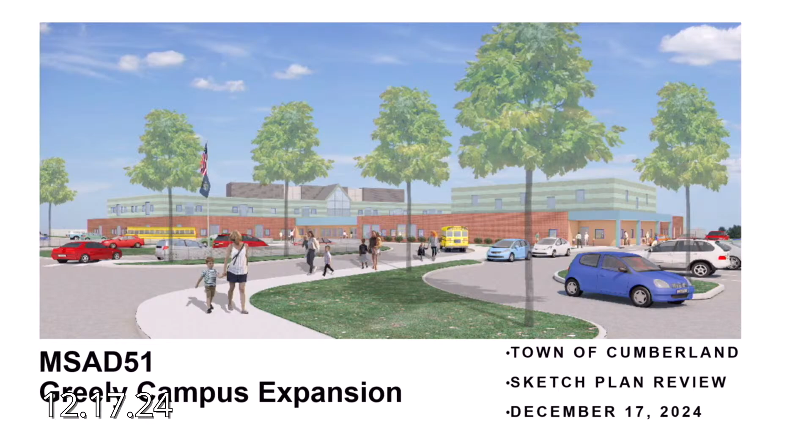Thank you. Good evening, I'm Jeff Porter, the superintendent at MSAD 51, and Pat will be providing the presentation, but I have a few words to introduce. First, the whole idea for the plan you're going to be presented with started back in 2018 with our strategic plan for MSAD 51. This came out of community conversations back in 2017-18, where our enrollment in the district started to go in a different direction than had been forecasted before. So the goal of the strategic plan, which is still in place today, is to review the district's long-term elementary education program and structures due to increasing enrollment now and into the future.

Just to give you a quick baseline, for Mabel I. Wilson School, which is pre-K through grade 3 right now: in 2014-15, there were 537 students enrolled. Today there are 730 students enrolled, and next September there'll be 752 projected. At GMS 4-5, in 2014-15 there were 315 students. Today there are 375 students, and in September we'll have 387 students, just to give you an idea about the continuing enrollment increases.

So elementary pre-K to 5, in 2014-15, there were 852 students altogether. Today, there's 1,105 students, and in September of this year, 2025, there'll be 1,139 students. So currently, we have 29 modulars on the campus.

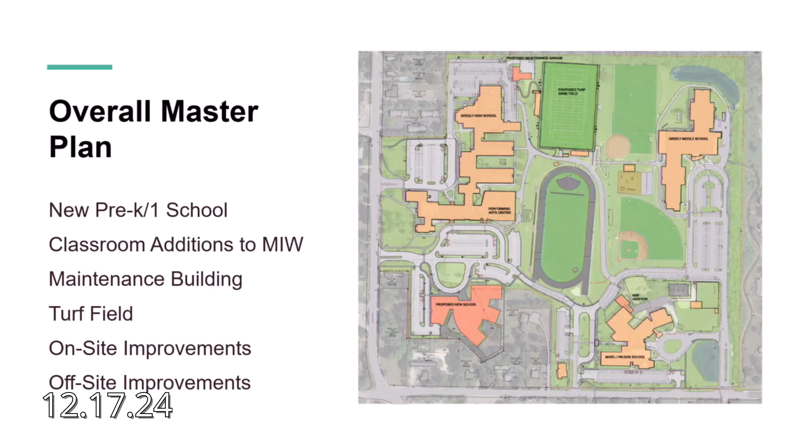There are also some small off-site improvements required. We've submitted for a traffic movement permit—the existing one on the campus expired, and because of the new school they're saying we need a new one. So that's been submitted, and we're working closely with the town on what those off-site improvements might be. They're minor in nature, but still pretty important, and we want to make sure everybody's on board and in agreement with those.

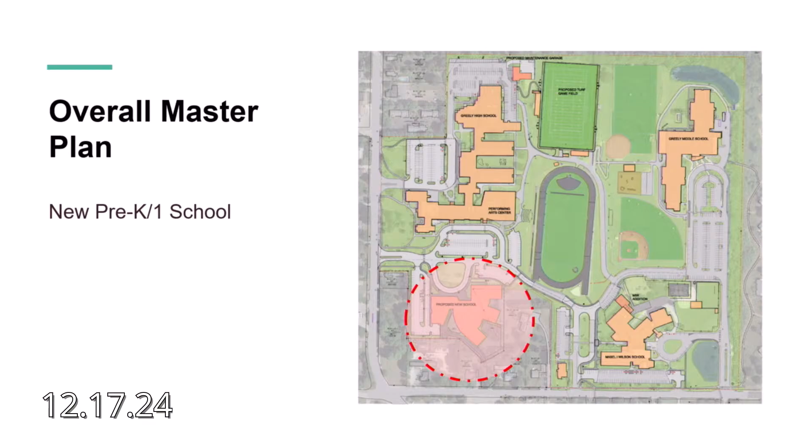So this is a pre-K through 1 school. The idea is that the pre-K and grade 1 students from Mabel Wilson will move over to this new school. Mabel Wilson will then be reconfigured as a 2, 3, and 4 grade school—grade 4 currently being in the middle school will move back to Mabel Wilson. Greely Middle School will be grades 5, 6, 7, 8, and the high school will remain 9 through 12. That's the grade restructuring that's going to happen.

The new school is designed to accommodate about 565 students, so it's a significantly large building. It's not insignificant, but as you can see, it begins to form the four quadrants of the campus, and it really does bring some closure to this whole property.

This is a site plan we're working on now. These are pretty well developed, but not yet at the point where we want to submit them—we want to maintain some flexibility so if issues or discussions come up, we can make changes. The idea here is we're going to maintain the existing main drive into the school campus.

First thing you come in, there'll be a parking lot area here, near the town cemetery. This will be staff parking, but it also forms a kind of queuing area for parent drop-off along this side—dedicated parent drop-off for the littles at this new school. There are 11 dedicated drop-off spaces, plus plenty of room for stacking in the drive aisle. The parking here accommodates about 65 parking spaces.

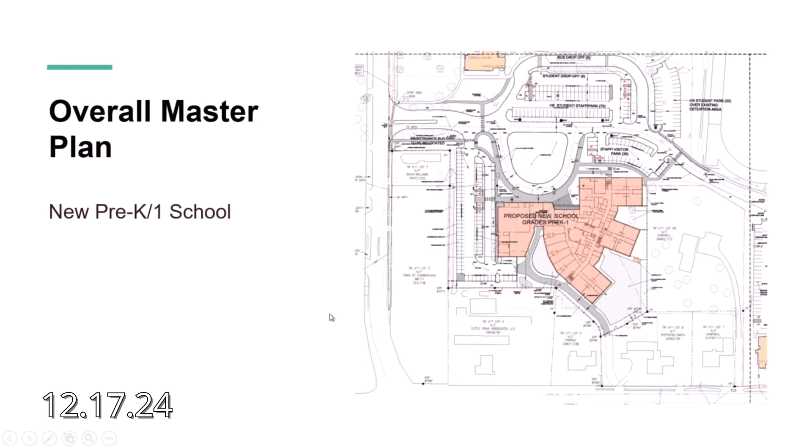Second item here is at Mabel Wilson. There's some circulation improvements, but the major building piece here is a small addition off the northwest or northeast corner of the existing classroom wing.

This will be, I believe, 4 classrooms, a 2-story structure that ties right in here. It's a kind of funky footprint, and the reason is because there are currently 2 big portable classrooms on this site, right here.

The idea is to build this addition while the school is still in session, while those classrooms are there, rather than waiting until the new school is built and then removing the portables before building the addition. So it's a different footprint, but it works within the confines of everything going on here. That's the small addition to Mabel Wilson.

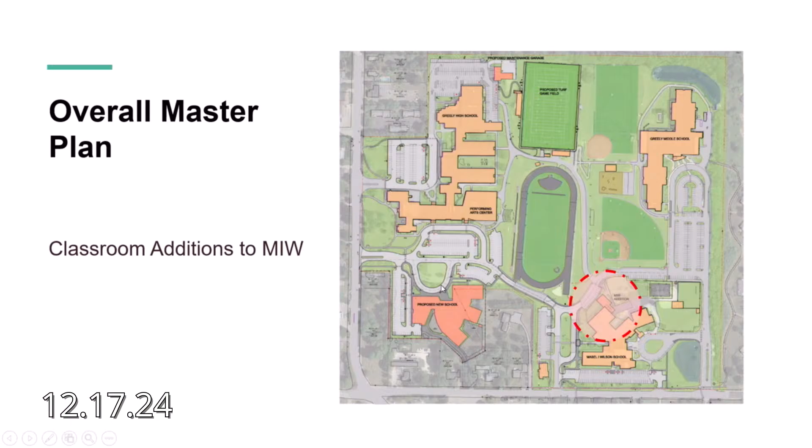This is the addition here, where the portable classroom buildings were, there are 2 buildings, one here and one here. Those will be removed ultimately, and that area will be returned to dedicated recreation space for Mabel Wilson.

Right now it's programmed as a basketball court, because we're going to be bringing 4th graders, older kids, onto this campus, and most of the playground equipment here is really designed for smaller age kids, so this will accommodate the older kids.

Where the portable was over here, this is just going to be reclaimed as grass open space. If you remember, Tuttletown was in this area initially before the portables came onto the site.

Tuttletown got moved over to this corner of the site, which was part of the open green space. They lost some green space there, and so now we're able to bring it back to the school again.

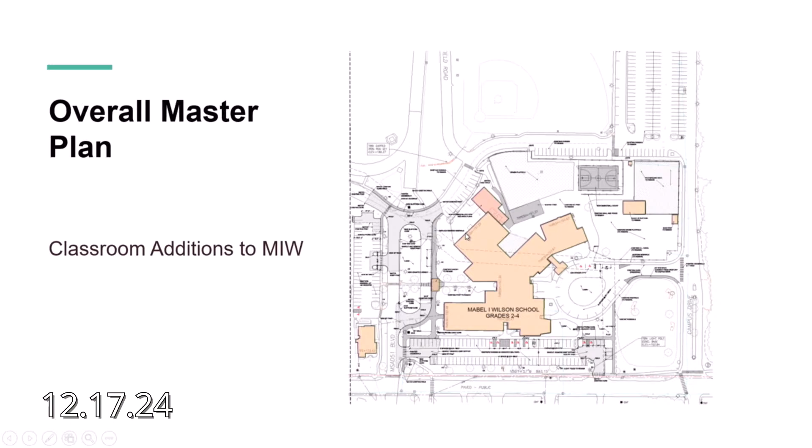The new maintenance building is up in the corner here. We were before you probably 2 months ago, and that building was approved at that point in time.

That building, in spite of its great appeal, is in pretty rough shape. So the idea now is to replace it up here in this corner of the site, back behind the pool, in an underutilized area of the property. That has been approved by the board.

I think we're pretty close to going out to bid on that project right now. So that's what's going on here.

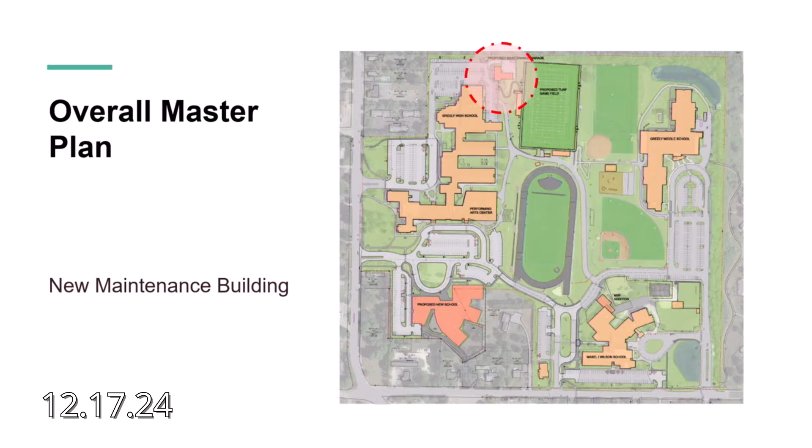Here's the building. It'll be a drive. It's really a 1-story building with a step in it. It'll drive down because there's about 6 feet of grade change between the parking lot up here and this lower area.

All of the yard storage and usage areas for the school will be in this lower area, which will be fenced off. It'll be hidden from view from most of the campus, and we think it fits into the campus really well.

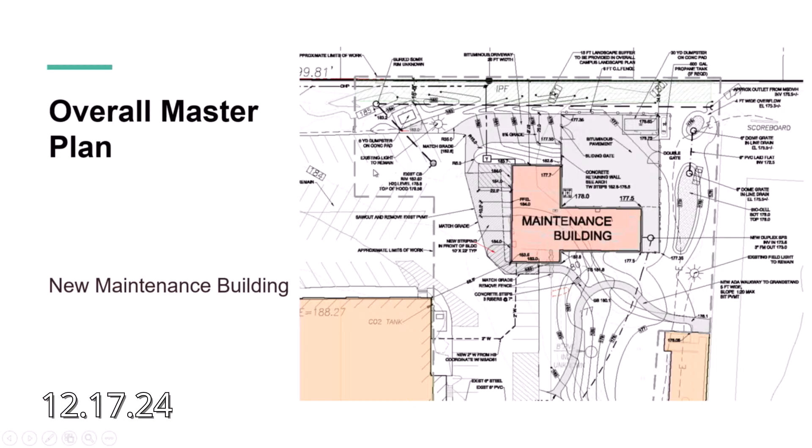Next item is the game field, the turf field. We've been working closely with the turf committee on selection of a vendor and a type of product for the turf.

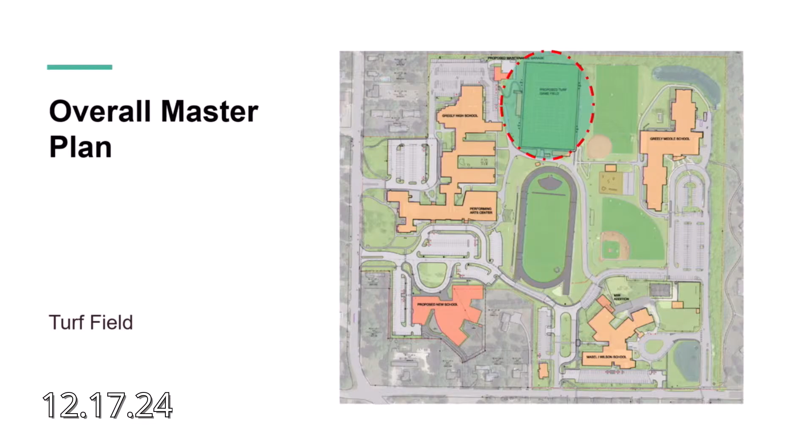Unfortunately Jesse, who's the chairman of that committee, isn't here, but the board came to us with pretty specific criteria. They wanted no crumb rubber, no PFAS, and a fully recyclable product.

So we interviewed six or seven turf vendors, and they ended up selecting a product which the board approved at their last meeting. It's fully recyclable, there's no infill at all in it, so that takes that whole issue out of the equation, and it's certified PFAS free.

This will be the first field of this type installed in New England at all, so we're leading the charge on this. I think it's going to be required eventually — in Europe they said it's going to be required in two or three years, so we're pretty excited about it.

The vendor's really excited to get a product like this going, and that project will hopefully get done this next summer.

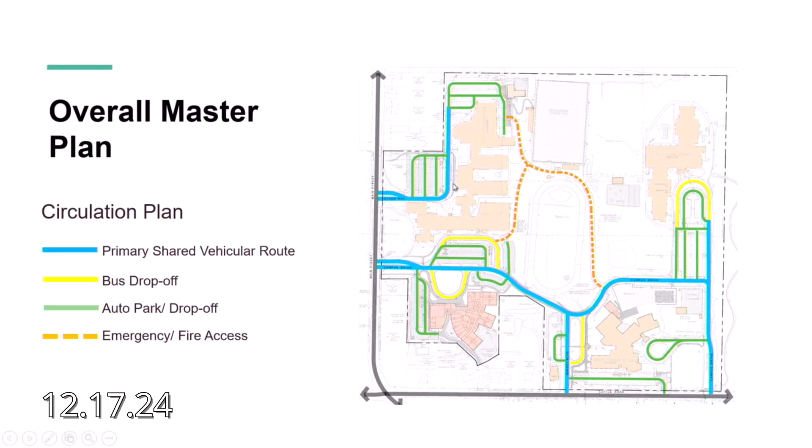We're doing that in a pretty cost-effective, simple way, primarily by taking a look at how these parking lots are currently laid out, and a lot of them don't meet current standards as far as aisle widths and so forth. They're congested, they're kind of unsafe, and so by reconfiguring those, we're able to add some parking with very little addition of impervious cover.

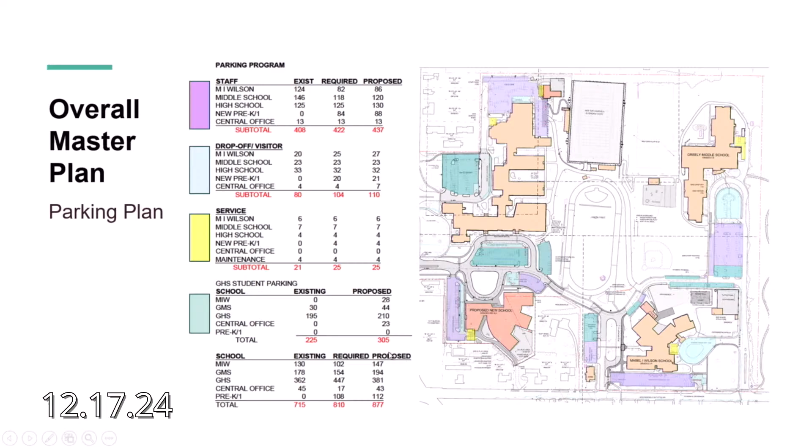A couple of small conversions, and I'll show you here. In this area, reoriented 90 degrees from the other plan, this is coming in off of Geiger Way. This is the Geiger building here. Currently, this comes in and it's one way through, extends to the back, and then it's one way out from this point on. This loops around and comes in here. This existing parking lot is only like 52 feet wide.

It really needs to be, each of these bays need to be 60 feet. The existing parking lot that's there is very narrow. The aisles are really tight, and I don't know if anybody's been in there at night trying to get in and out of those spaces, but it's very, very difficult. So we first looked at this and said, well, we really just need to expand that in order to make that safe and meet the town standards as far as parking spaces.

Then we started looking at, well, we're also impacting the high school parking at the PAC, and we need to accommodate that somewhere. So what we've done is this drive through here currently comes in about right here. All we've done, this would be the expansion of the existing to this point, is really more or less add parking on both sides of that drive aisle going out. By doing that, we've picked up about 30 spaces in there, which is a really good thing.

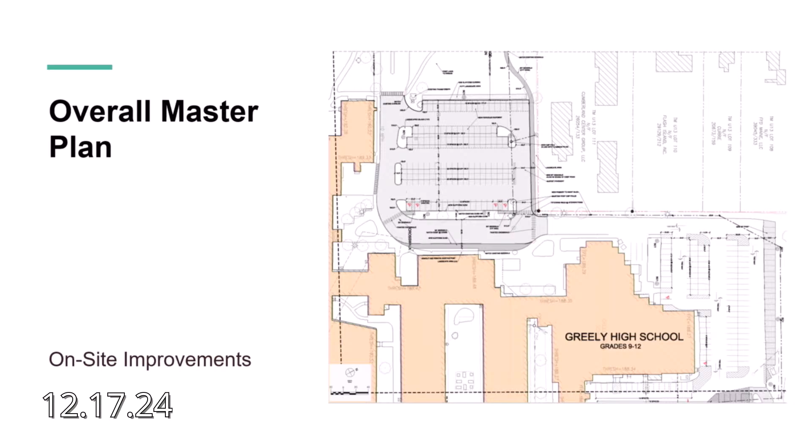So one of the other lighting areas that wasn't in our original program, but Jeff has asked that we take a look at, is the lighting that goes from the field area along the back side of the high school over towards the PAC. That area is pretty dark at night, and a lot of people park there to go to events at the game field. So we're adding some lighting there too.

This is the landscape and lighting plan. I know it's hard to see at this scale, but we intend to provide buffering along the property lines. We hadn't originally planned any here because there's a high fence, but given today's discussion, we're willing to take a look at that and add it to the plan as we move forward.

Based on conversations, it wasn't with the board, but we had a council meeting regarding proximity or some relief relating to the cemetery, and one of their comments was to add some buffering along the cemetery here. So we've got that.

We've got buffering along all sides of the new school to deal with the neighbors. We've met with this neighbor, who's your postmaster, and it's kind of tight in here, but he's on board with us planting some plants on his side of the fence to accommodate that, and we've got some agreements we're working on.

There's some new plantings associated with any of these areas that we're touching — trees, shrubs, and ground covers. So it's a pretty robust landscape plan, and it'll continue to evolve until we get to the point where everybody's pleased with it.

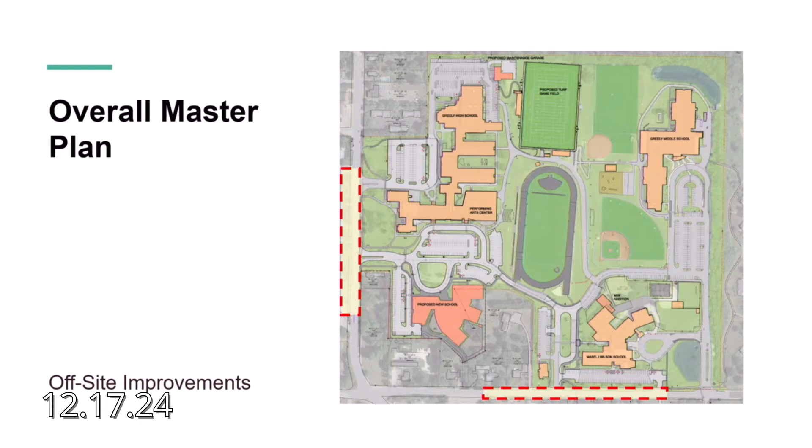Any questions about any of this so far? Well, why don't you finish it, then we'll do the questions. Okay.

The way this works is they'll complete the presentation, and then the board will ask their questions, and afterwards we'll let the public. My preference is, if it's civil engineering related, we'll have the civil engineer answer; if we've got questions for the superintendent, we'll have him. So probably the three of them, but the board gets the first cut at it. So have you got some more, Pat?

Well, I think what I talked with Andy about — he's excited about going through a small presentation on stormwater for you guys. I think since probably 80% of the people here are concerned about stormwater, that will be fantastic. Okay, so I'm going to turn it over to Andy.

And then the only thing after that is really, we've got a couple more images of the school, if there's anybody that has any questions about the school. I don't think at this point people are more concerned about ground issues, if they are, than the style of the building. I would agree with that. And then there was just a couple wrap-up things about schedule and where we are in the process. Let's get Andy to do the engineering thing, the board will have a cut at it, and then we'll turn it over to the public. Good evening, folks.

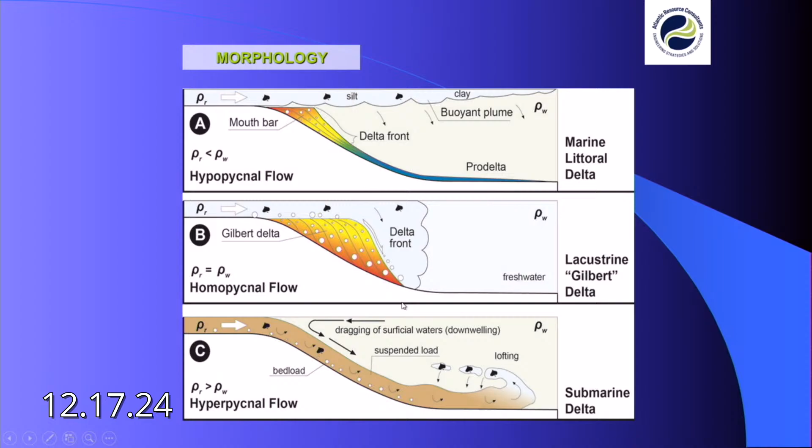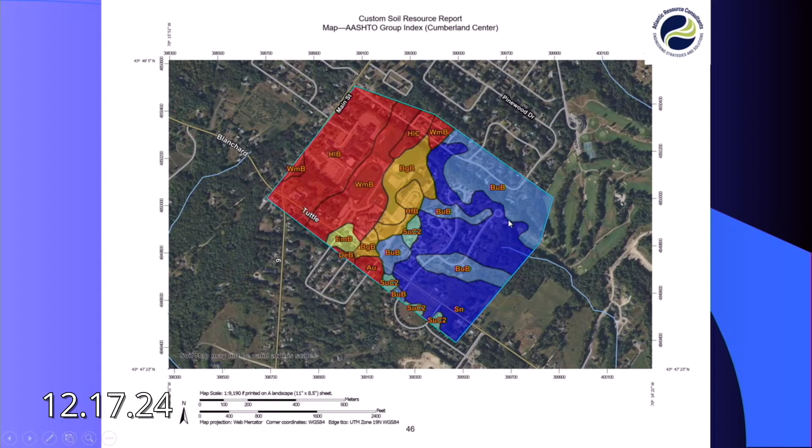So what does that look like on a soil map? These two colors are a little inverted, but I'll talk you through them. This is what's called an AASHTO group index of the soils. It shows soils in red and orange that are predominantly coarse-grained, sandy, and in blue, finer and finer graded soils. The dark blue here are the real fine-grained, silty clay soils. The second one I'll show you, which is even more striking, is the NRCS web soil survey, which does these helpful ratings. This is a rating for ease of construction, or restriction of dwellings without basements.

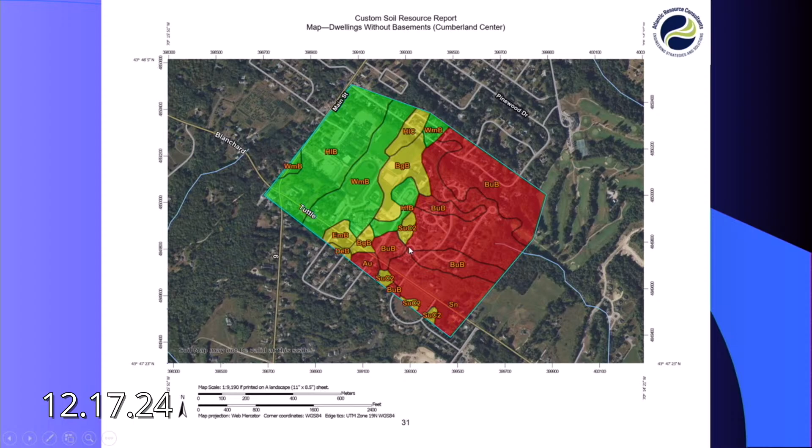The greens show areas that are not restricted. The yellows show areas that are somewhat restricted, and the reds show areas that are very restricted. These are very restricted because of high water tables, poor drainage, and all the things you would expect on the soil types that you see here because of the landform we talked about.

So given those base conditions, what has happened to the campus over the years that has contributed to or alleviated some of those soil conditions?

If I go back to this, the whole area slopes down to the south and east. Under this condition, everything off that soil, off the school campus, drained basically by sheet flow down to these drainage ways that come across this site. Some of the area up here drained off and down across the site to what is the headwaters of the stream here. So the whole school area drained down onto this property before anything was built.

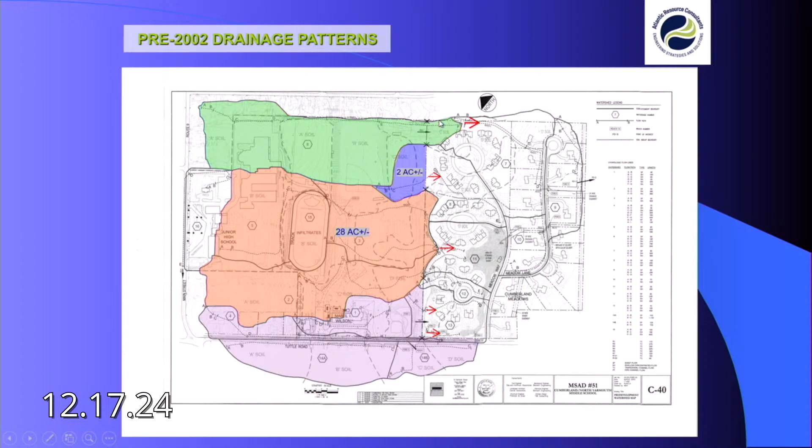This 2-acre area here drained down to another area that drained through the Cumberland Meadows site. Then you have the green area at the top, which runs down that swale between the school property and the properties to the northeast here. You'll see as I run through the timeline what has happened to that.

So when they built the middle school, they put in this detention pond here. One of the things they wanted to do with this plan was to reduce the amount of runoff coming onto the Cumberland Meadows site.

So what they did is captured all the area in blue, took it to this new detention basin, and then piped it through the neighborhood. I've drawn this as a straight line - you'll see where it actually runs in a minute. It actually runs down here, down here. Initially it outletted about here, and then it was continued down to the far side of Meadow Lane, to where the drainage system for this entire development outlets.

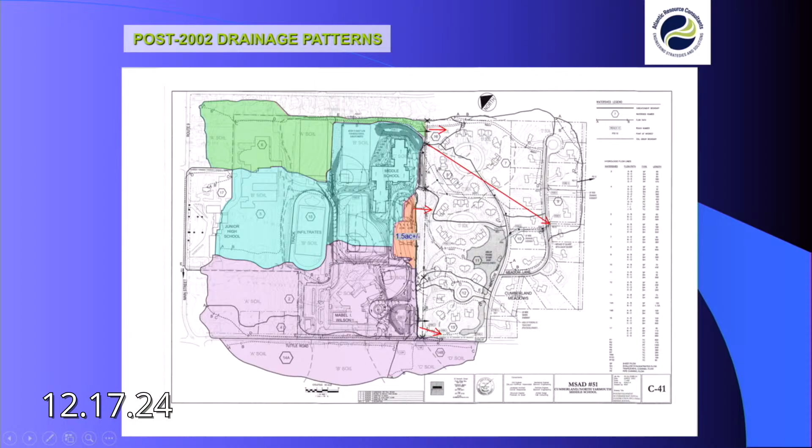So basically, all of that blue area was designed to go through the detention basin and bypass the whole of the Cumberland Meadows site, taking that out of the contributing area to Cumberland Meadows and Meadow Lane. What was left is this little 1.5 acre area of the middle school parking lot, which was too low to get into the basin to get around. So effectively, that plan reduced a 28 acre area down to 1.5 acres contributing to the Cumberland Meadows site, again just to alleviate the drainage issues there. So this is what it looks like on an aerial.

So the summary of that, what they did for the middle school, which was presented in the stormwater report at the time, showed this area, what they call point of analysis number 2, this smaller, reduced area of 1.5 acres, and it shows what it did to the runoff. I'm sure you've seen these in stormwater reports you've reviewed before. Basically you look at the pre-development and post-development runoff under the 2-year, 10-year, and 25-year storm, and you can see the pre-development flow compared to the post-development flow. So you had reductions in peak flow, anything from 60% to 80% in the 25-year storm as a result of what they did there.

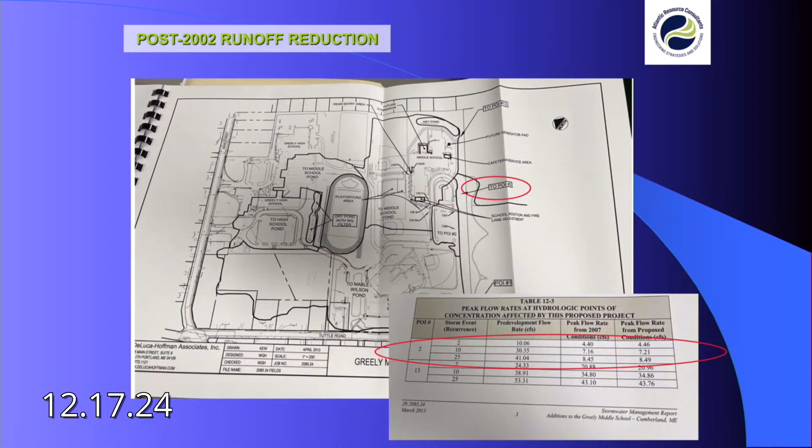And the summary in the 2013 stormwater report appeared to indicate that they thought this had alleviated a lot of the drainage issues on the Cumberland Meadows and Meadow Lane sites.

Of course, with those soil conditions, these things have to be maintained and continue to drain well. Typically in those really heavy soils, it's pretty significant engineering intervention that you need to keep the water table down, usually involving numerous underdrains, networks of underdrains. In soils like that, they'll typically operate somewhere between a 15 and 20-year cycle, if you're lucky, before they start silting up and need renewal. I think some work has recently been done on the Cumberland Meadows site to renew some of those underdrains. That's entirely expected.

So moving on to the new project, we want to take the same approach as far as water quantity goes as has been done in the past. The plan is basically to expand that blue area even further to take more of the campus down through that detention basin and bypass it right through the Cumberland Meadows and Meadow Lane subdivision.

We do that by capturing the field, which wasn't previously captured, and the new school roof drainage and parking lot drainage is piped into the system that goes into the basin that currently exists, which we're going to put underground down here. It all goes down to that detention basin and out piped through to the downstream end of the Cumberland Meadows and Meadow Lane subdivision. So that's essentially the approach we're taking.

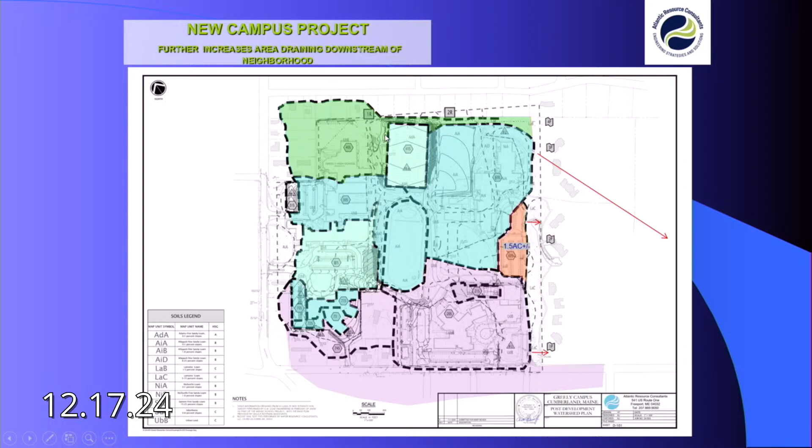As far as water quality goes, we're looking at some infiltration using underground chambers for the roof runoff for the new school. As Pat mentioned, some pervious pavers here, some pervious pavers in the parking lot addition, and then the stone base and granular borrow under the field effectively filters that before it goes into the collector drains. I'll talk a little bit more about that in just a second.

So this gets into some of the questions we've received, quite a few of them through letters sent to DEP, which then forward them to us and ask us to respond. We've put together responses to all of those, but we're not going to send them in until after this meeting, because other things may come up and we may want to address those in that same response.

The first one was notifications. If there's anybody here who didn't get a certified notification of our DEP filing, please let me know. I can leave you my card and my email address. I know DEP did receive a couple of letters saying people hadn't been notified. The people concerned were actually on our certified mailing list, so mailings were sent. I think Carolee was one of them.

I think what happened was we sent out the certified mailings before we put in the application, but you know how the Postal Service works now. The town was notified that the application had gone in, but some of the certified mailings hadn't been received yet, even though they'd been sent out. So I think there was a delay somewhere in there, and Carrie can probably fill in the blanks when she comes up to talk. But there was some confusion.

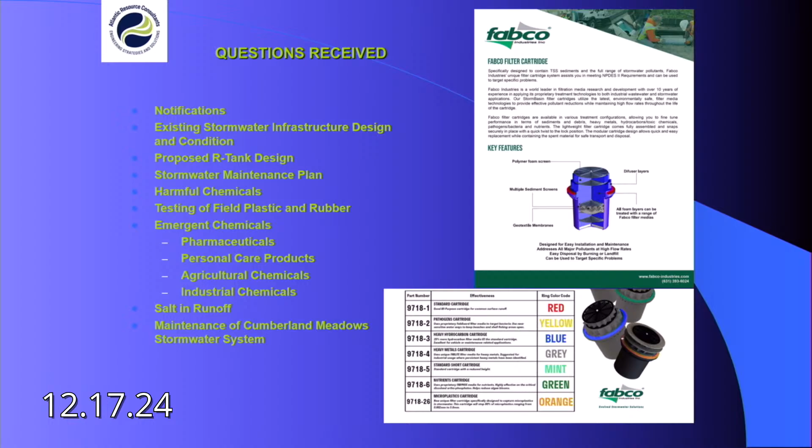So what you're saying is that we can have a wonderfully designed drainage system that the district does, but unless something is done on the town side, you've still got basically a swamp down in Cumberland Meadows unless the town upgrades their drainage system?

Well, if you look at the base soil conditions, the hydrology, and the morphology of that site, there are things we can do and things we cannot do. It doesn't matter what you do on the site—this location has always been wet and will always be wet. Short of under-draining, and with the particularly heavy soils they have down there, you'd be talking about putting herringbone under-drains 20 feet on center, which is what you'd do if this were an agricultural field to dry it out. The water table is high, the soil conditions are poorly drained, and it will remain a wet site. There are things you can do to reduce or mitigate the impact of the wetness, but you're never going to fully solve it because it sits at the bottom of a landform where the water table's high and the soils are poorly drained.

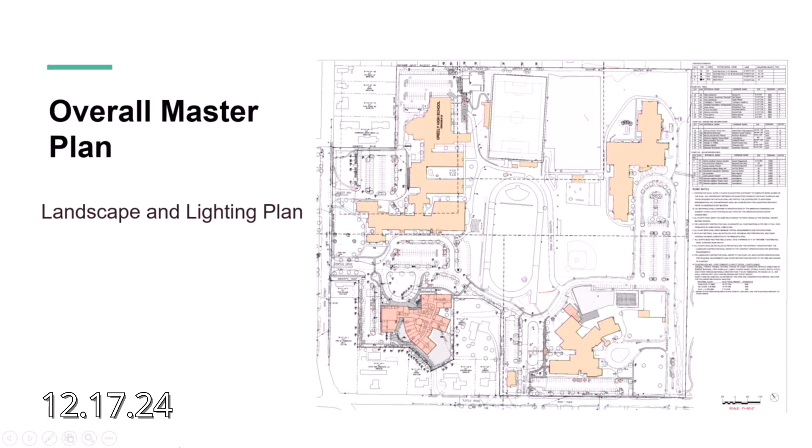We talked with the fire chief about that. We're going to probably use that for construction access, but there's no desire to make that into any kind of public access to the school site, or to provide even a sidewalk connection. So it'll remain as an emergency access. We're going to put a gate in the fence there. But it's not going to be developed for any kind of parking or drop-off zone or access for anybody coming from Tuttle Road to the school.

Pat, regarding the cemetery - my understanding is that where those parking places are next to the cemetery, you're going to put something up higher than just a curbing so that we're not having cars running into the cemetery. That was one of the concerns that somebody on the council had.

There will be a curb there, and there is a fence at the cemetery line right now - an existing split rail fence that runs continuously. But a car can go through a split rail fence in 30 seconds. I thought the understanding with the town was that there was going to be something a little higher than just the small curb. Well, we talked about maybe putting boulders or something in there.

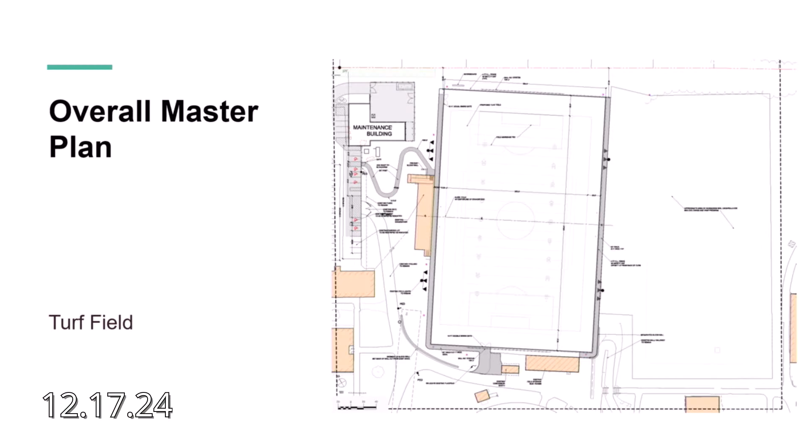And then all of that would get encapsulated with a foot of clean loam over the top of all that. So that's in process. I think by the time we make our application to you folks, we will have a solution in sight for that.

The next one is more, I think, of a Jeff issue, and that's with the new turf field. You're going to have probably at least 50%, if not more, events going on at that field. And as you're aware, there's quite a concern from the neighbors in Cumberland Meadows. I know about it because the 3 years I was on the school board, they were all over me like a cheap suit with legitimate complaints.

And I guess my question is, I think at this point it's really necessary to come up with a formal use program for that sound system. And I think you had said in a public meeting that you were going to turn the speakers facing the school, but

that whole sound issue at the high school is like Dracula, it keeps coming out every time you drive a wooden stake into it. So we did have an adjustment made to the sound system, and this has been an ongoing issue. We hear about it not just from the neighbors, but we also hear about it from people who attend the games and events at the field.